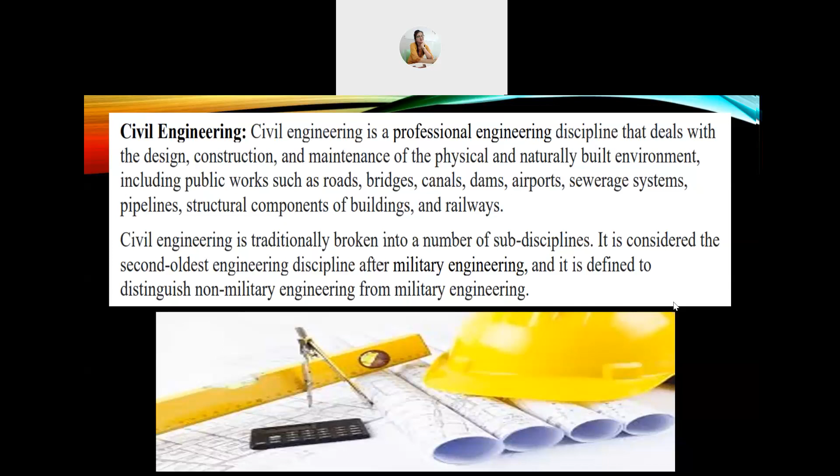History of civil engineering: in the 18th century, the term civil engineering was coined. The first self-proclaimed civil engineer was John Smeaton. You have to remember this name, John Smeaton.

He constructed the Eddystone Lighthouse, and in 1771, Smeaton and some of his colleagues formed the Smeatonian Society of Civil Engineers, a group of leaders of the same profession, that is, civil engineers.

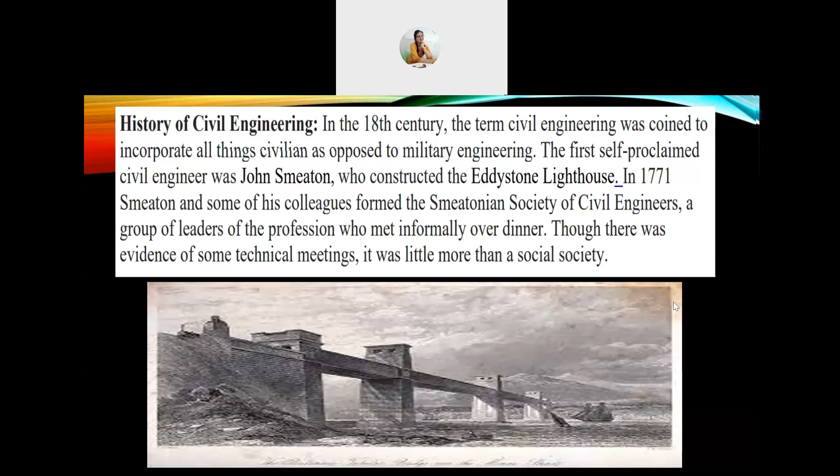They formed the society by meeting informally over a casual dinner, and there and then they decided to form this society, the Smeatonian Society of Civil Engineers. Though there was some evidence of technical meetings of the society, that information is very limited.

Next, in 1818, the Institution of Civil Engineers was founded in London, and in 1820, the eminent engineer Thomas Telford, remember this name, became its first president.

The institution then received a royal charter in 1828, formally recognizing civil engineering as a profession. The charter definition for civil engineering is mentioned below.

This definition is very important, and you have to write it exactly the same way because it is a chartered, or rather coined, definition, and you can't change its words or the placement of words.

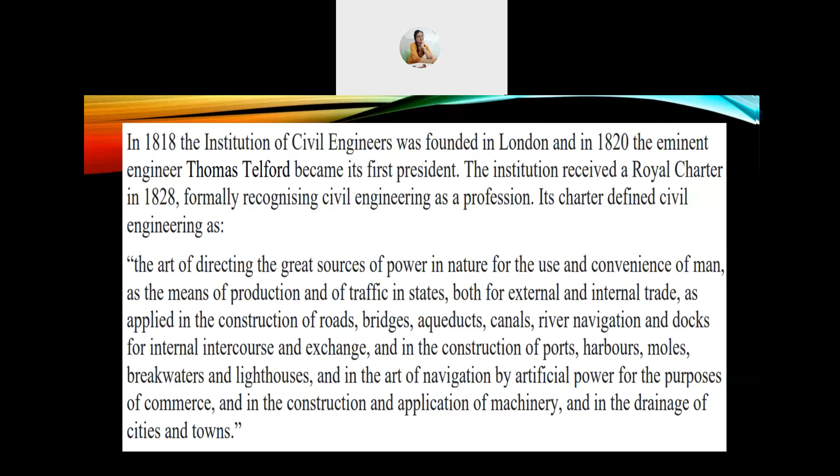The definition is: the art of directing the great sources of power in nature for the use and convenience of man, as the means of production and of traffic in states, both for external and internal trade, as applied in the construction of roads, bridges, aqueducts, canals, river navigation and docks for internal intercourse and exchange, and in the construction of ports, harbors, moles, breakwaters and lighthouses, and also in the art of navigation by artificial power for the purposes of commerce, and in the construction and application of machinery, and in the drainage of cities and towns.

The next topic is recent breakthroughs in civil engineering and its innovation. The world's production industries have already generated tremendous amounts of economic growth, but industrialization of cities has also led to significant challenges, including overcrowding and extreme pollution.

Urban environments are often home to many industrial facilities, and people come to the city seeking employment. But large metropolitan hubs are running out of space to house their residents. With overcrowding, resource demands increase, and as cities grow, urban environments face more pressure to provide large populations with sustainable supportive infrastructure.

So what is sustainable supportive infrastructure? This includes food, water and safe roads. Advanced civil engineers are needed now more than ever to provide solutions to these critical issues.

Civil engineers use innovation to improve building materials and construction methods - this is the main and basic role of any civil engineer. For example, engineers are creating technologies to give buildings healing abilities and skins, and they are also developing technologies that reduce the environmental load of the structure, which is important.

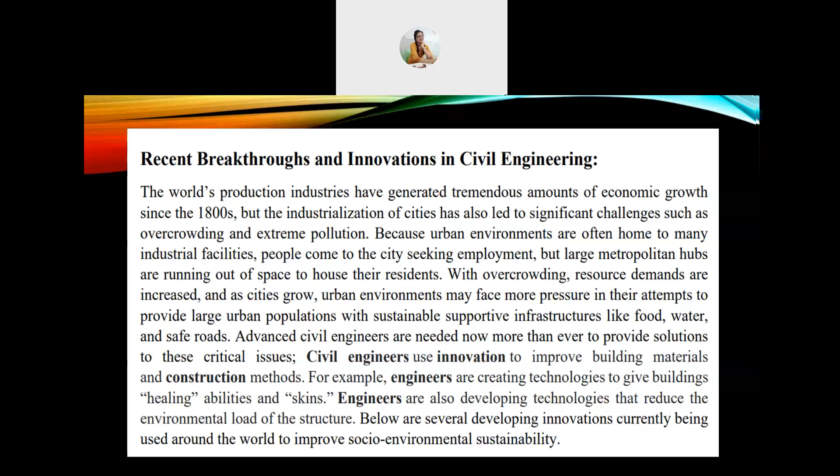The first one is plastic roads. Related to these innovations, there are five or six innovations. After this lecture, I'll be showing you short videos so that you can understand better about these innovations and their definitions.

So the first one is plastic roads. In response to massively generated local waste and plastic pollution, India's government began experimenting with plastic roads during the early 2000s, using waste plastic as a construction material.

An early report of India's Central Pollution Control Board discovered that even after 4 years of use, the Jambulingam Street in Chennai, one of the first plastic roads in India, had not sustained much damage even after a year of using plastic waste. The board cited that no potholes, rutting, raveling or edge flaws were discovered during inspection or evaluation.

This level of performance attracted local governments who were looking to get rid of Tamil Nadu's urban environments' discarded shopping bags, foam packaging and other unrecyclable plastic products disposed in the streets. As of 2015, any Indian city with a population of at least 5 lakhs is required to construct their roads using waste plastic as the core material. This was formulated in 2015 after seeing the use of waste plastic in Jambulingam Street in Chennai.

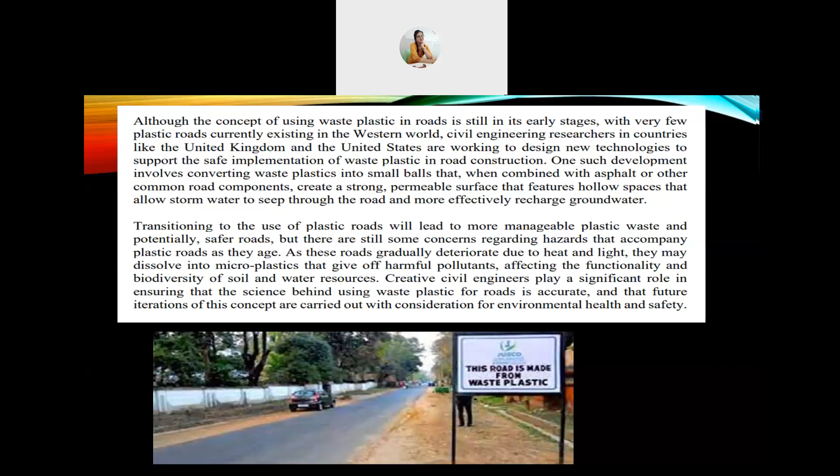As these roads gradually deteriorate due to heat and light, they may dissolve into microplastics that give off harmful pollutants, affecting the functionality and biodiversity of soil and water resources. Creative civil engineers play a significant role in ensuring that the science behind using waste plastic for roads is accurate, and that future iterations of this concept consider environmental health and safety.

The next innovation is green roof systems. The Environmental Protection Agency, in short EPA, defines a green roof as a vegetative layer grown on a rooftop. Today, green roof systems have become popular all over the world, not only for their beauty but also for the benefits they provide towards environmental sustainability.

Germany is currently leading the world in green roof technologies, and they have implemented green roofing systems on approximately 10% of German homes since the technology emerged in the early 1970s.

Civil engineers are responsible for ensuring that green roof supportive infrastructure, for example a comprehensive watering system, is engineered to consistently deliver an appropriate amount of resources, and the roof itself must be designed to effectively improve environmental sustainability. However, civil engineers still face obstacles when planning the installation and maintenance of green roof systems, like high cost and harsh climates, but innovations in modern engineering techniques have allowed the industry to consistently offer environmental benefits to urban communities.

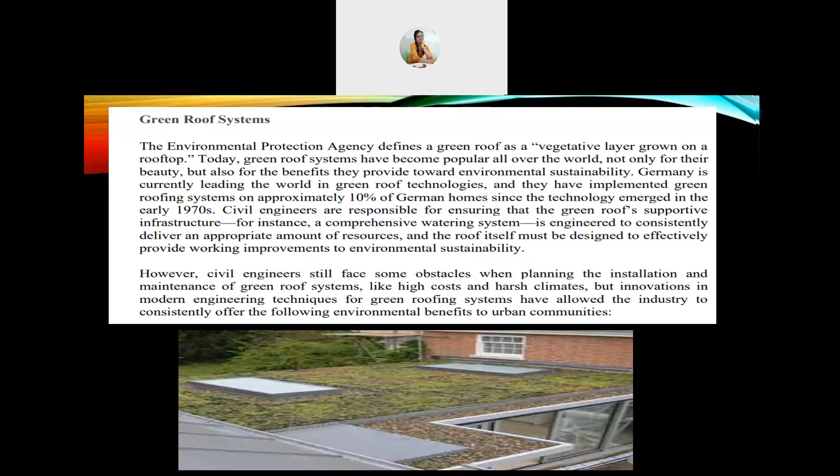The environmental benefits that urban communities get from using green roof systems are mentioned here in 4 points. The first one is enhanced urban biodiversity. Green roof systems accommodate new flora which may act as new habitats for different species of plants and animals.

Number two, cooling of buildings. The vegetation on the roof acts as thermal insulation, storing excess heat and decreasing peak temperatures within the building. This means less energy must be consumed to heat the building, resulting in decreased energy cost and lower pollutant emissions.

Number three, reduce runoff quantity. On average, green roofs retain 40 to 60% of total rainfall. Storing this rainwater as it falls has been shown to result in runoff reduction of 34% between September and February, and 67% between March and August. By reducing runoff, civil engineers that design green roof systems can limit strain on sewage systems and lessen the cost of roof damage.

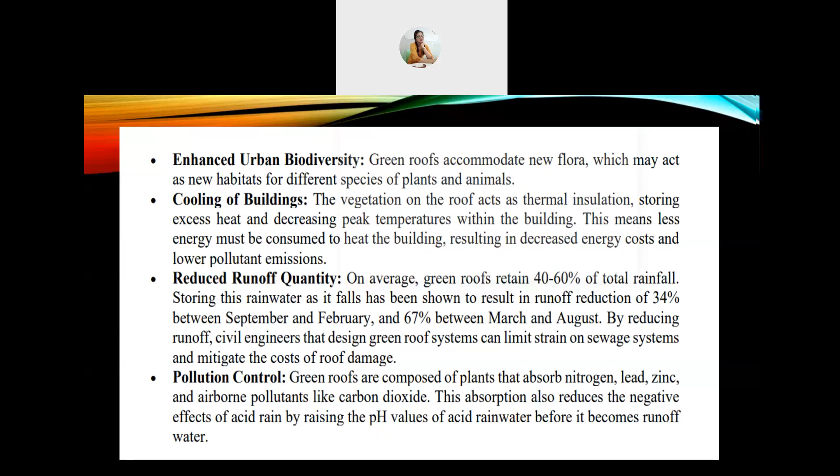The last one, pollution control. Green roofs are composed of plants that absorb nitrogen, lead, zinc, and airborne pollutants like carbon dioxide. This absorption also reduces the negative effects of acid rain by raising the pH values of acid rainwater before it becomes runoff water.

Next, eco-floating homes.

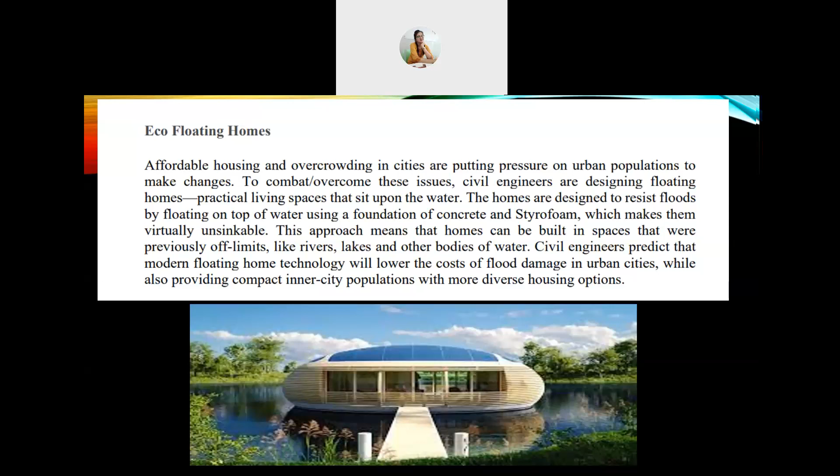Affordable housing and overcrowding in cities are putting much pressure on urban populations. To combat these issues, civil engineers are designing floating homes, practical living spaces that float upon the water. These homes are designed to resist floods by floating on top of water using a foundation of concrete and styrofoam, which makes them virtually unsinkable. This approach means homes can be built in spaces previously off limits, like rivers, lakes, and other water bodies. Civil engineers predict that modern floating home technology will lower the cost of flood damage in urban cities while providing compact inner city populations with more diverse housing options.

Next, vertical farming. Using multi-story high-rises to grow food is known as vertical farming. The Association for Vertical Farming has found that compared with traditional agricultural methods, growing food indoors uses 98% less water and 70% less fertilizer on average. To generate the light and water necessary to keep plants healthy while remaining cost effective, vertical farmers use a combination of energy efficient LED lights and hydroponic technology.

We'll study LED lights in upcoming lectures. Hydroponic technology includes plumbing, irrigation, and filtration. By implementing modern automation techniques to regulate these systems in vertical farming, civil engineers can also limit the cost of labor required to maintain these farms. The costs associated with vertical farming are still quite high, but as science in this field advances, civil engineers will be able to provide populations of unfarmable regions with opportunities to grow their own produce.

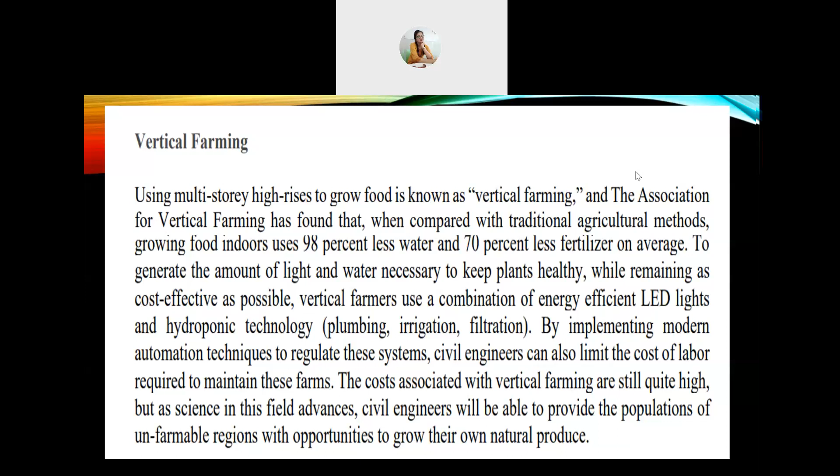Many entrepreneurs and scientists are currently evaluating how growing food inside a building coincides with improving social and environmental sustainability. Vertical farms also have higher yields than traditional farms, allowing the production of more food using far less urban space. Significant progress in the study of vertical farming could lead to improved food diversity, especially for residents of population dense urban areas and places normally unable to grow produce using traditional methods.

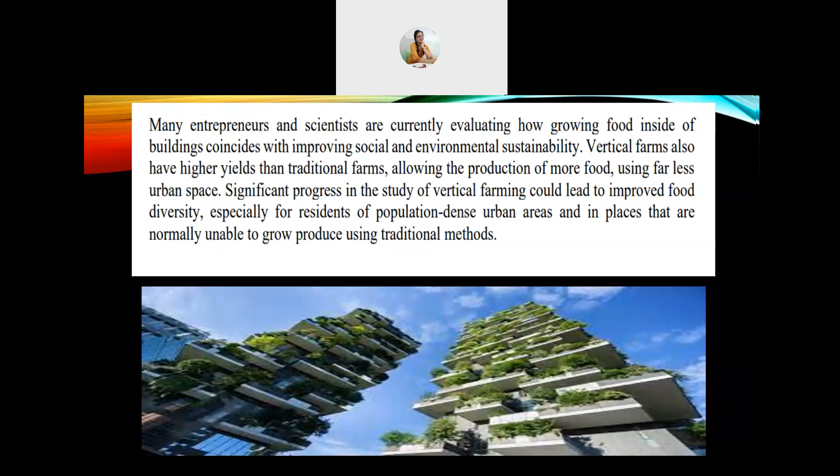The last one is rainwater harvesting. Harvesting rainwater is a climate adaptation strategy that has been used in ancient and modern societies. The antiquated rainwater harvesting techniques of the past were attempts to cope with severe climate conditions by storing water as it fell, allowing populations to drink the water or prevent oversaturation of the land during extreme precipitation. Modern rainwater harvesting is fundamentally the same in theory, but advancements in science and engineering have introduced sophisticated filtration and rain capturing technologies that boost the efficiency of the process.

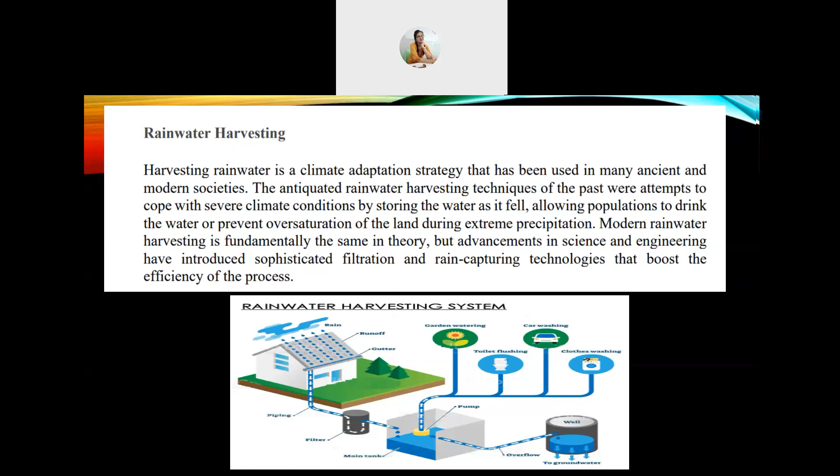Dutch engineers and researchers are using effective large-scale implementation of rainwater harvesting infrastructure, which reduces stormwater runoff by 20 to 50%, by lowering the strain that excess storm precipitation usually places on sewers and drainage systems. This is made possible by mounting rainwater catchment devices on the roofs of buildings, then routing the collected rainwater through a treatment system and finally into the storage tank. To ensure the effectiveness of this rainwater harvesting, the contents of each storage tank must be depleted before significant rainfall events occur. Therefore, civil engineers must obtain the knowledge and experience to analyze precipitation patterns and water usage rates of a region before installing any rainwater harvesting systems.

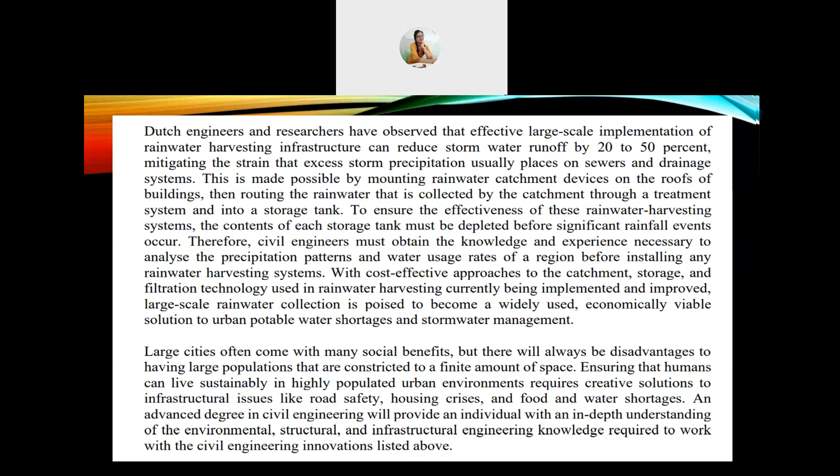With cost-effective approaches to catchment, storage, and filtration technology in rainwater harvesting currently being implemented and improved, larger scale rainwater collection is poised to become a widely used, economically viable solution to urban potable water shortages and stormwater management. Large cities have many social benefits, but there will always be disadvantages to having large populations constricted to a finite amount of space. Ensuring that humans can live sustainably in highly populated urban environments requires creative solutions to infrastructural issues like road safety, housing crisis, and food and water shortages. Any advanced degree in civil engineering will provide an individual with an in-depth understanding of the environmental, structural, and infrastructural engineering knowledge required to work with the civil engineering innovations stated above.

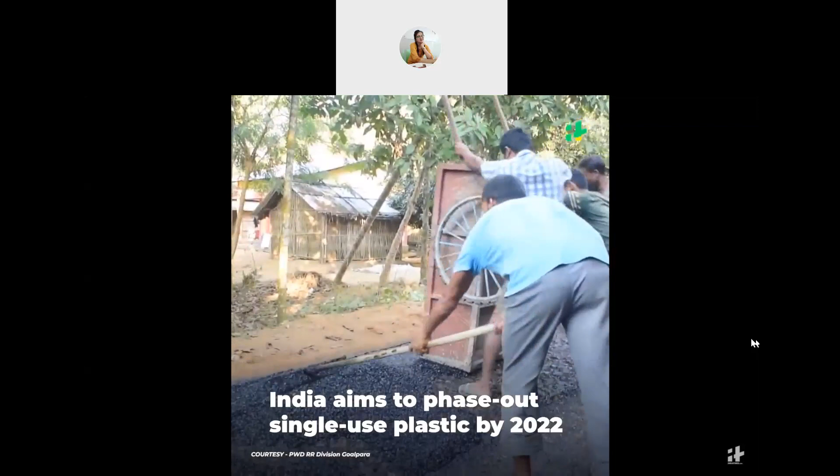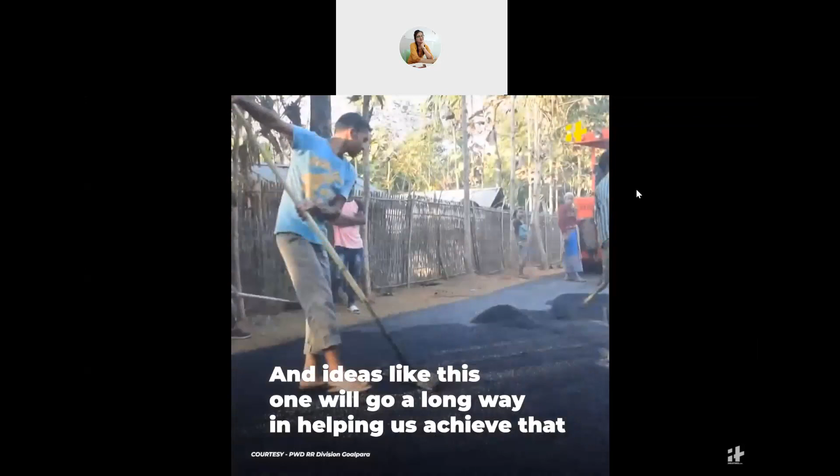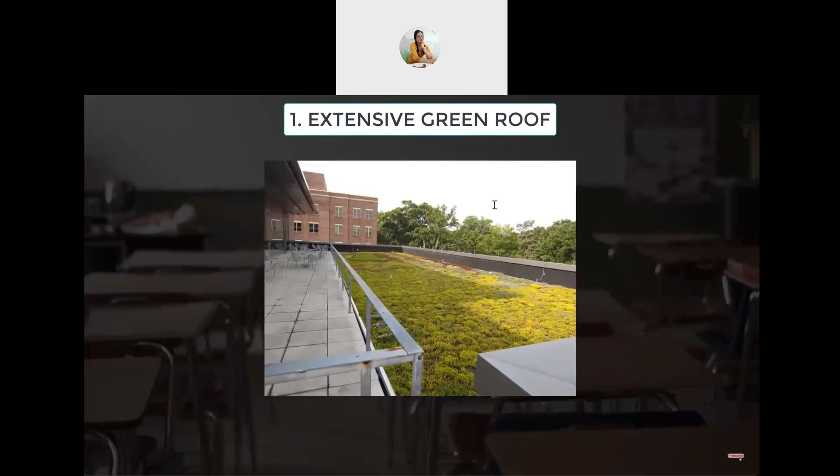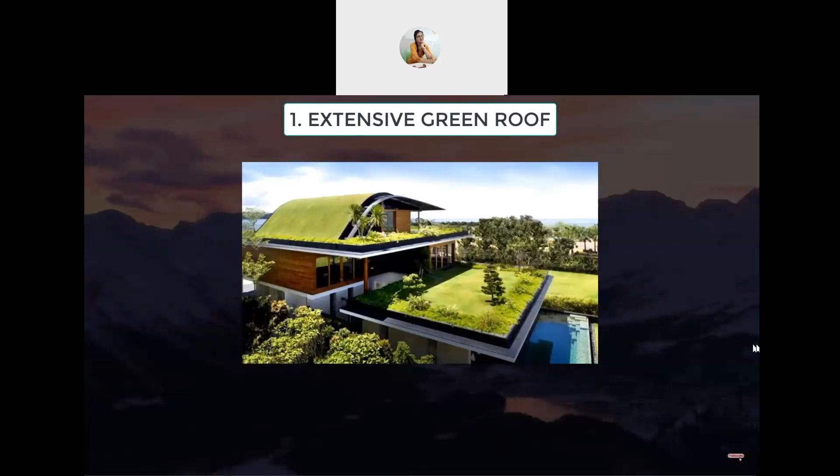They fall into three main categories: extensive, intensive, and semi-intensive. An extensive green roof has a shallow growing medium, usually less than 6 inches, with a modest roof load, limited plant diversity, minimal water requirements, and is often not accessible. Intensive green roofs have more soil and a deeper growing medium, sometimes several feet, that can support more diverse plant selections, including small trees. They have more substantial structural loads and need more frequent maintenance and watering, and are usually accessible.

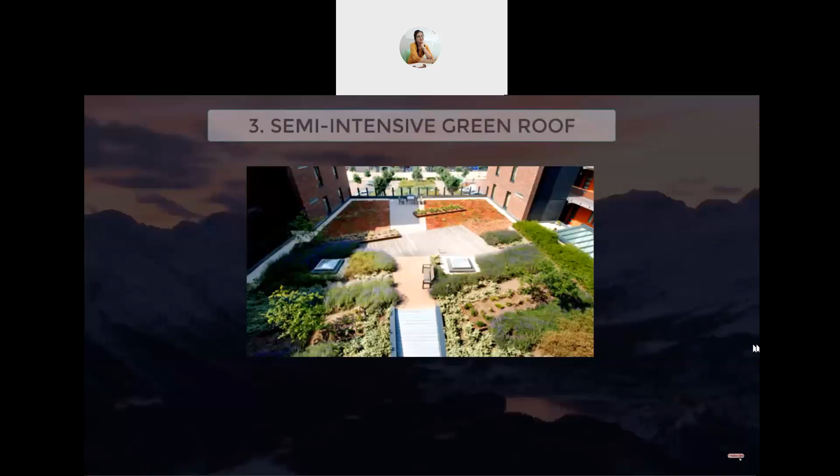Semi-intensive green roofs include features of both types. The appropriate depth of any green roof depends on the roof structure, the plants chosen, annual rainfall, and stormwater performance requirements. There is also another type of green roof, that is modular green roof.

Some green roofs are installed in one large integrated section, while modular green roofs use portable planting beds placed together to create a large green roof. The modular units are often plastic or metal trays filled with growing medium. Modular green roofs can be installed incrementally and can easily be removed for maintenance and inspection of the roof layers underneath. One drawback, however, is that moisture cannot flow between units, increasing the impacts of wet and dry spells on the plants.

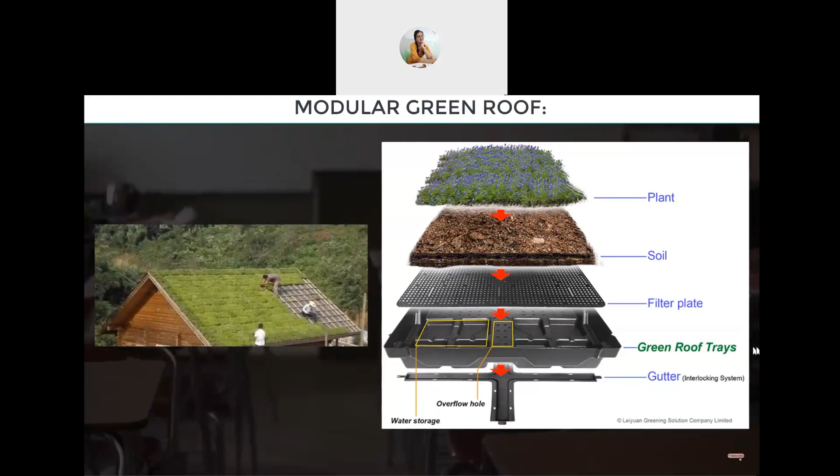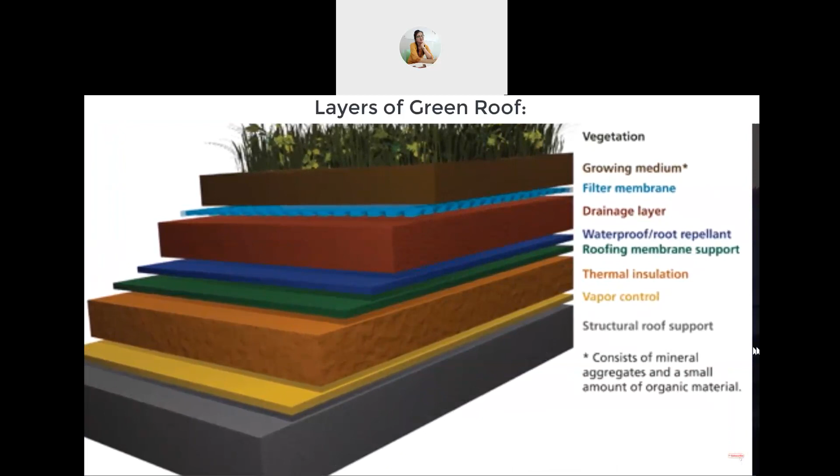Next, we talk about layers of green roof. All three types require specific layers of roofing material not found on regular roofs. The basic anatomy of a green roof consists of vegetation, growing medium, filter membrane, drainage layer, waterproof or root repellent layer, roofing membrane support for planting above, thermal insulation, vapor control layer, and structural roof support. Each of these layers performs a specific function to keep the plants alive and protect the structure beneath.

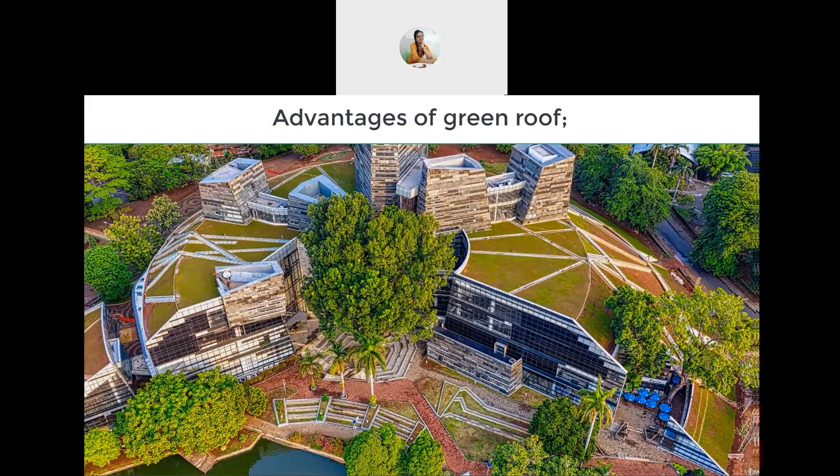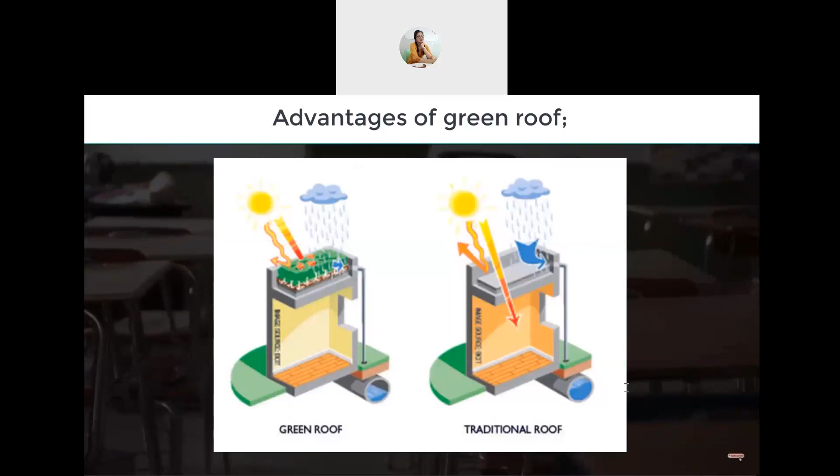So we discussed the definition, types, and layers of the green roof. Now we talk about advantages and disadvantages. First, advantages: these improve the drainage system and increase the lifespan of the roof. Green roofs boost thermal performance and help out the environment in many ways. They also support wildlife habitats and increase air quality.

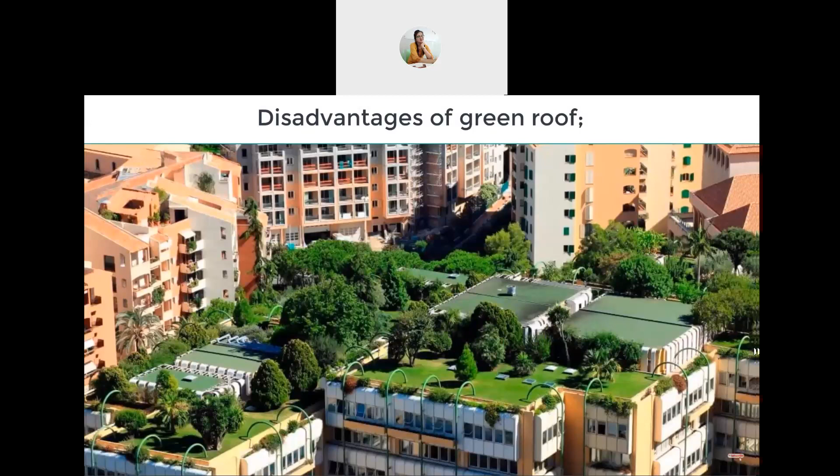The main disadvantage of green roofs is that they are more expensive than traditional roofs, but worthwhile in the long term because they save energy and help the environment. The other disadvantage is that the dead load on the structure increases due to green roofs, and they require extra maintenance. These roofing systems are used in some countries, but in India they are very expensive. The government should give incentives for those who install green roofs.

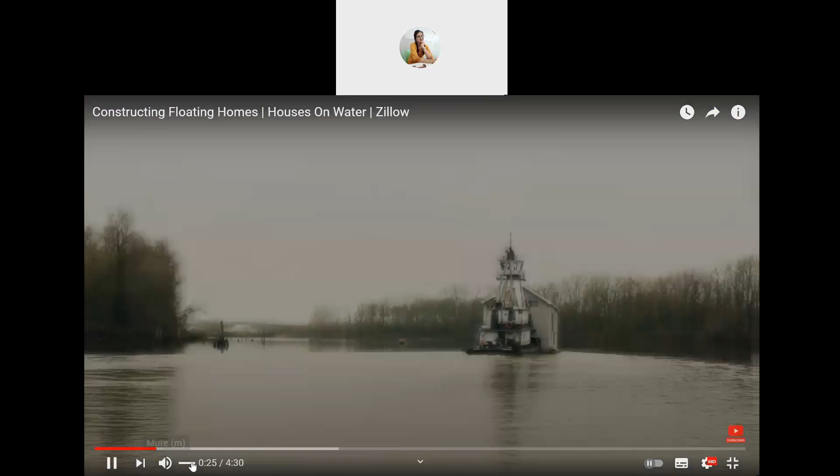I've grown up on the water. We've probably built, it's amazing, 50, 60 homes on the river. We build floating homes in Portland, Oregon.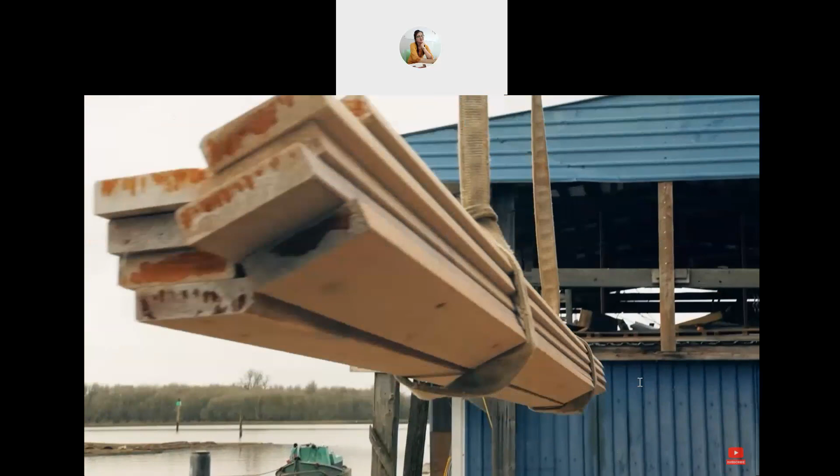My father got out of the Navy and decided to start building homes. And I was just at that age where I was a little too antsy to stay in college, and decided to follow that path.

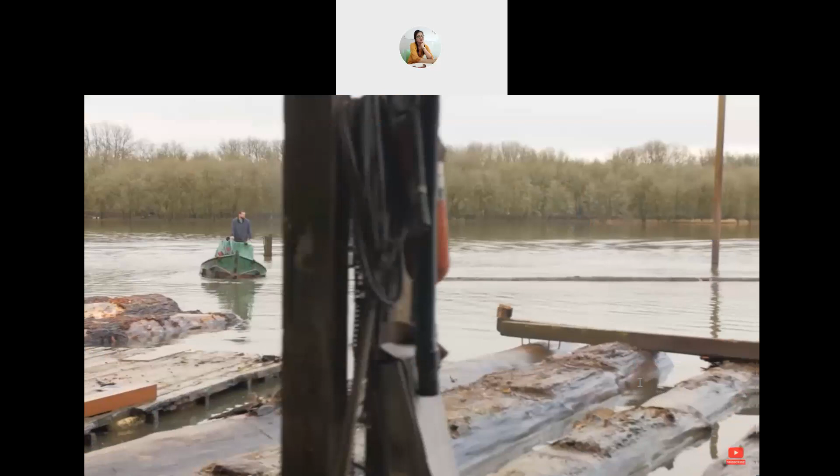We get a lot of calls from all over the country. There's not a lot of guys that do what we do. And believe me, I would love to do other areas, but this is where we have our facility, all of our guys. We don't travel.